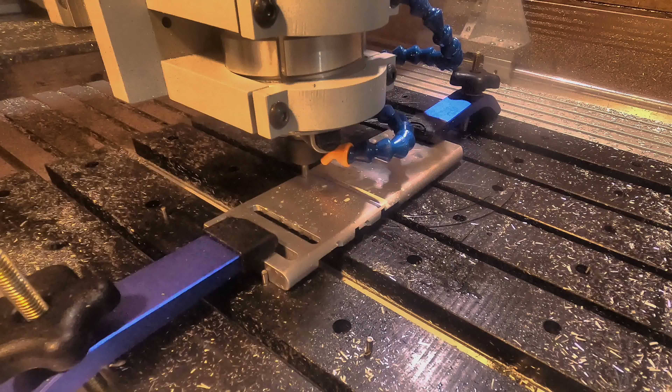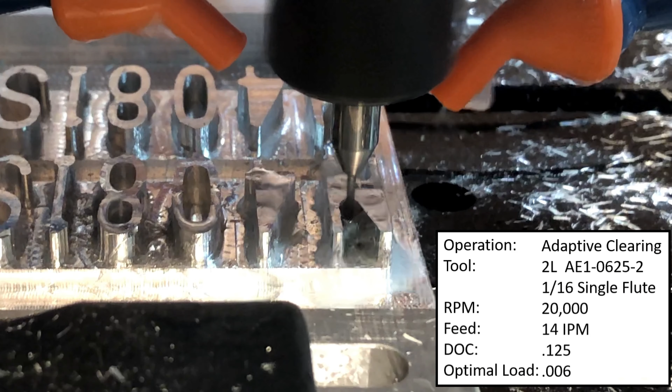Today on Bodie Knows, we're making a custom embossed aluminum keychain on a CNC router. Let's look at the CAD design, machine setup, machining operations with feeds and speeds for you to try, Fusion 360 tips, and CAM programming. I learned a lot making these parts, and I hope you can take some knowledge away too.

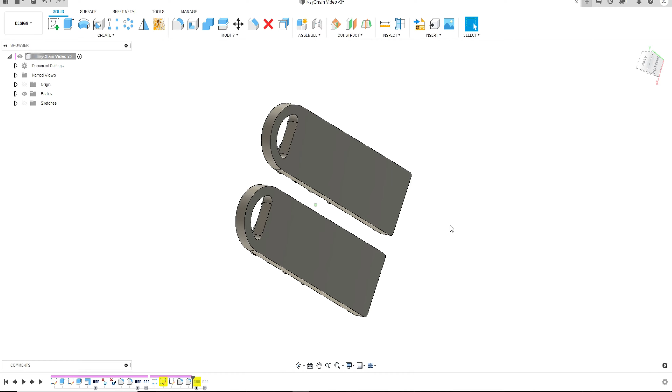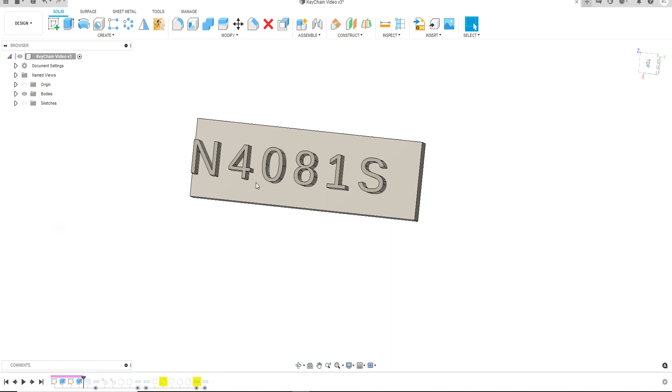Anyways, to get going on the CAD design, first step, just started with a block, pretty simple. I then added these numbers. So something to point out here, if you look at this sketch, to get this to fit, obviously right here these letters and numbers are too short. If you try increasing the height of them, it increases the length as well, and that's no good. Maybe there's an easier way to fix this, but obviously that's not going to work.

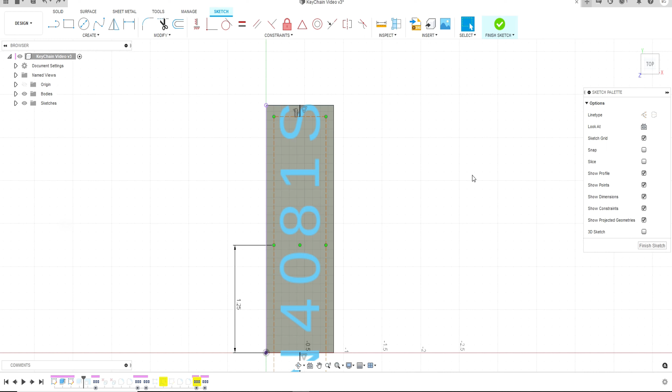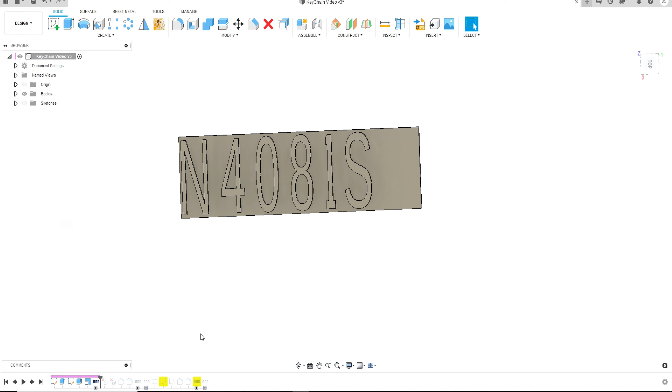So the way around this that I chose to use was just by using a scale function. So right here, I just did a non-uniform scale in the X direction only, and that works really nicely. After doing that, I moved all the bodies around to fit like I wanted to, so just using the move tool, put them exactly where you want. I'm a big fan of keeping bodies separate when you're doing things like this.

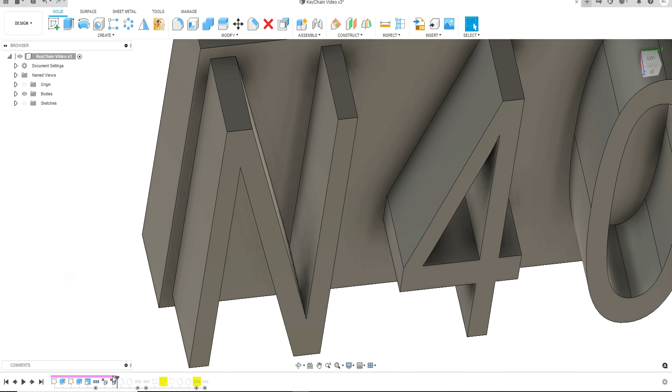Next small modification, sometimes these Fusion fonts come in weird with extra faces and curves that you don't need, so if you try to blend this edge right there, you can end up with problems. So I used a delete face operation right there and on the other side of this end to get rid of those faces before applying my blends. And if you don't do that, those blends can get all screwy.

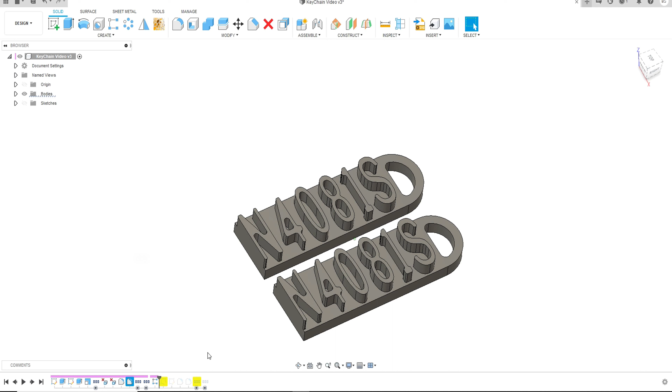I then did that on the rest of the letters and numbers, added this small cutout since it's a keychain, cleaned up the outside profile, basically getting exactly what I want. So really simple design here, only a few steps. I then just used a linear pattern to get my other piece, and you're off to the races. Comment here, I don't think you'd actually need to model this second part if you just used a linear pattern on the CAM side as well, but I didn't realize that until about halfway through my CAM setup.

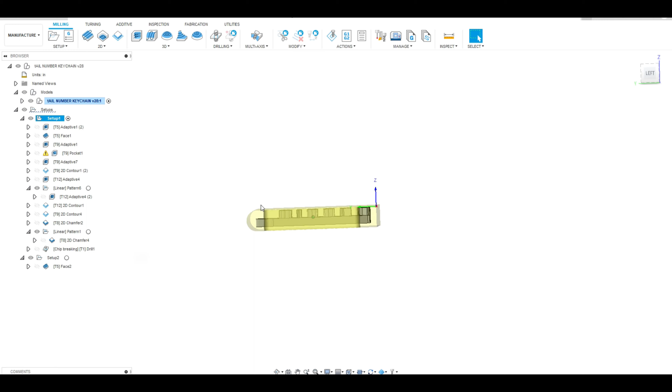To start out on the CAM side of things, I modeled my stock, so that's just an extra piece of aluminum I had laying around. I think it's really helpful to actually use the stock you're going to be using. Started out with a 6mm Datron single flute 4-in-1 end mill, basing my feeds and speeds off this Datron cutting guide, although you do have to modify them a bit because they're telling you to go 40,000 RPM and some ridiculous feed rate that is just not feasible on a desktop router. But it's a good place to start. Their numbers are better designed for high-speed machining and not so much traditional machining.

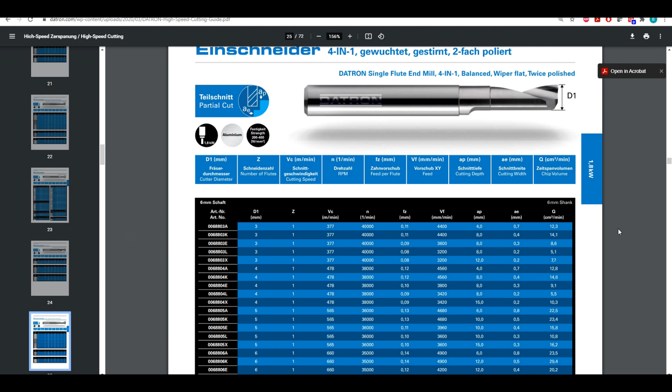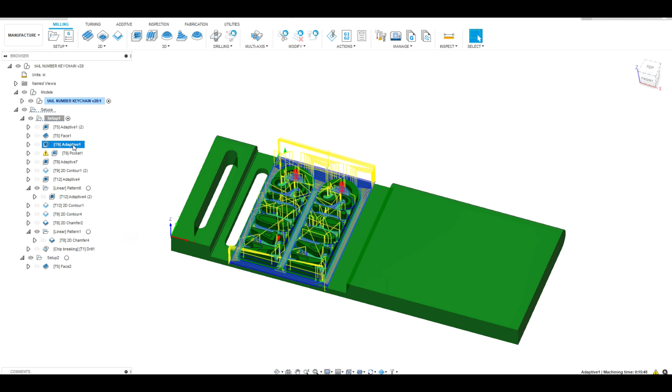Anyways, this tool, we're going 24,000 RPM, 6mm step down, and 50 thou optimal load. Ended up working out pretty nicely. We'll look at it in the machining video. Facing operation just to clean up this top, make it nice and smooth. Then come in with another 3D adaptive, this time with a 3mm Datron single flute. Here we're going 24,000 RPM, but I ended up dropping this to 20,000 when we started machining. 25 thou optimal load and 1/8 inch step down.

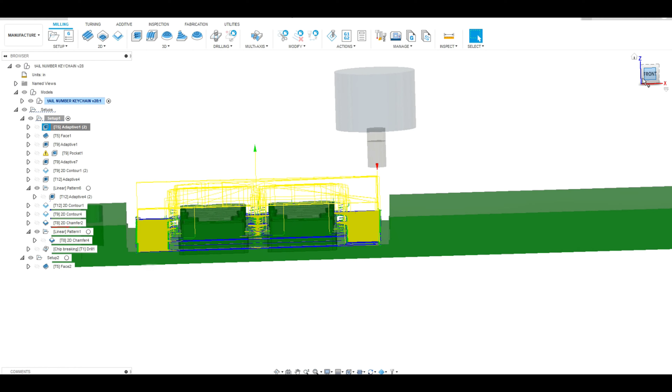Forgot to mention on this first adaptive operation, I do have the shaft and holder option turned on. This tool only has a 7mm flute length, so after that 6mm first cut, if you go down further, you're going to rub the side of the shaft. So I have that shaft and holder option turned on, so it automatically steps over and avoids rubbing the shaft on the stock. That works out really well. I like that feature a lot.

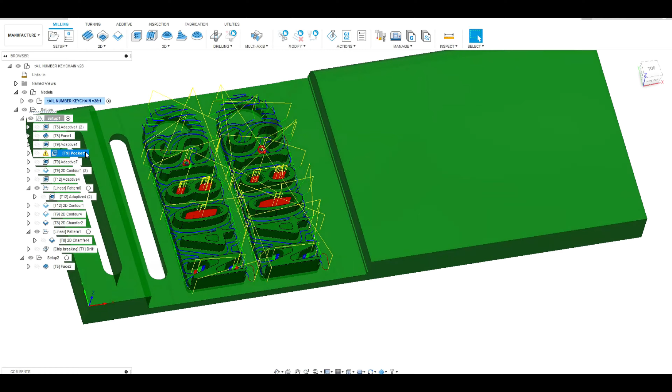After the 3mm adaptive, we do a 3D pocket again with the 3mm Datron single flute, and that's just to get into these small pockets that the helix entry on the 3D adaptive couldn't get. I don't like this ramp situation a lot.

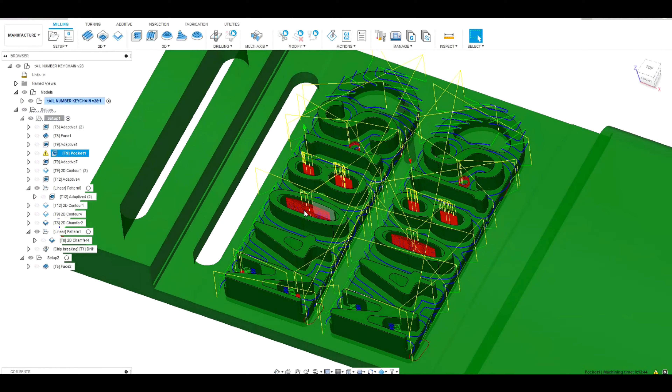I'm not exactly sure what this is called, but I had the lead in way too high, so there's a lot of air cutting on this operation, and next time I would definitely switch things up so there's less air cutting time. Do another adaptive in this pocket, followed by a contour just to cut all the way through, so when I do the facing on the back, I have no material left.

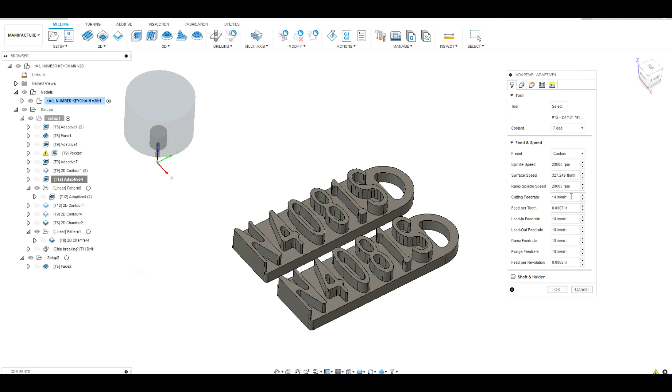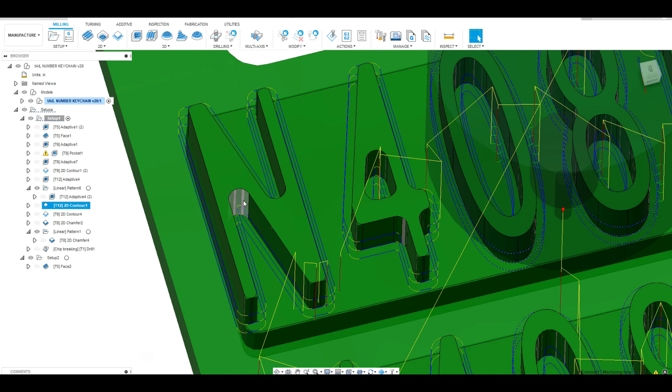I do another 3D adaptive here with the stock to leave turned way down so I get fully in these corners. So when I come around and do this contour next, I don't run into a bunch of stock in these corners and break my end mill, and this worked pretty nicely.

I used a linear pattern here just to do that same operation on the second part. As I said before, I think you could just linear pattern this entire operation and not even model the second part. It would also cut down considerably on computation time. In hindsight, I should have just done that.

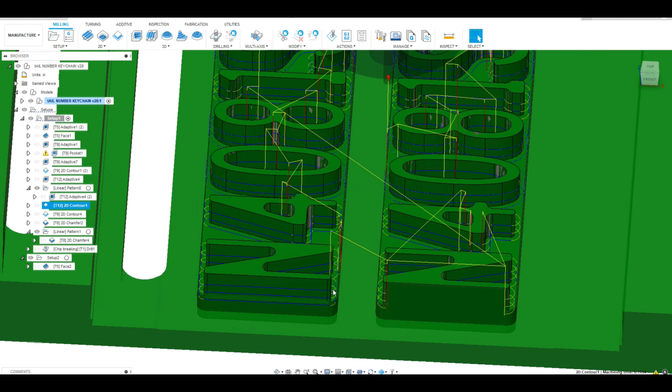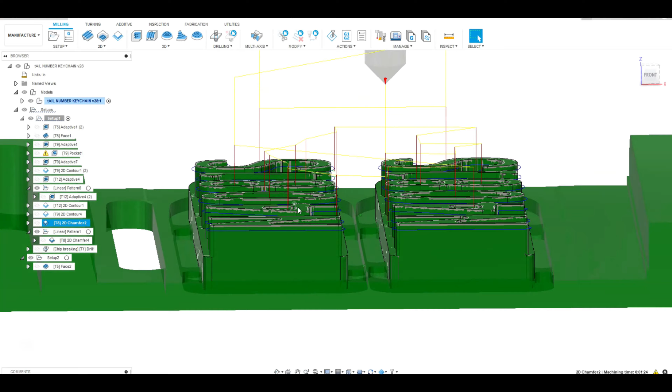So again, next we do a 2D contour for all these letters and numbers with the 1/16 inch single flute. I go even slower here, only 12 inches a minute, and now it's only taking off the stock to leave from the previous operations, which was about 5 thou. Next, you do a chamfer on all these letters and numbers here. There's only a 10 thou chamfer, super light duty, worked out pretty nicely.

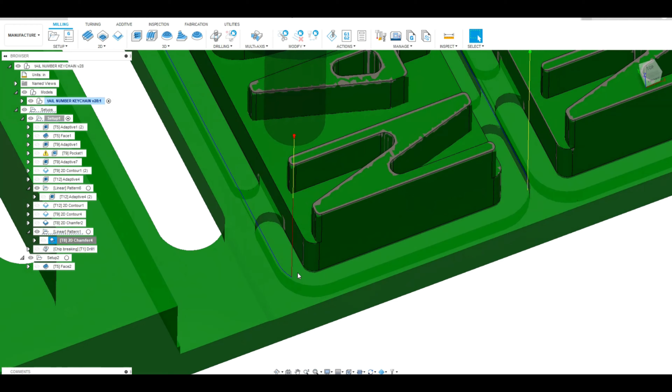And then I chamfer this outside profile of the whole part. So I have it set up here so the tool comes down and comes straight in. I really like that. If you were to set this up what most people would probably consider the normal way, just by selecting this entire outside contour, you'd get a path that looks like this. It would start on the corner and round the corner as it comes in, and that gives you a chamfer that looks like this. I don't love that. I think it's kind of weird how it starts on the curve.

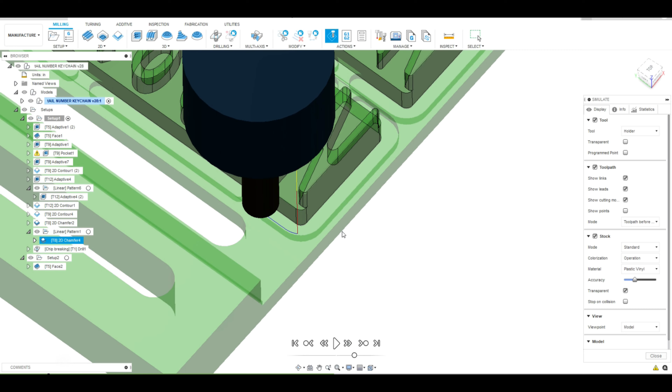I also think that my machine would jar around a lot if it came straight down and immediately accelerated to the left. So I would rather have all that movement happen out here and then come straight into the chamfer toolpath. So the way you can set that up is just instead of selecting that entire outside contour, only select what you want. So click again, make sure open contour is selected.

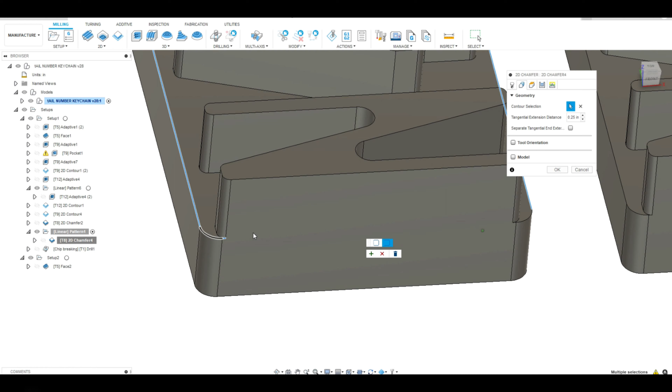Now 1, 2, 3, make sure nothing else is selected by default. So yep, right here we got to get rid of that. It'll get all wigged out if you have other parts in there that aren't part of the path you want. Do not hit OK, hit accept current contour. You need a tangential extension distance. That's just the distance away that it starts out here before coming in.

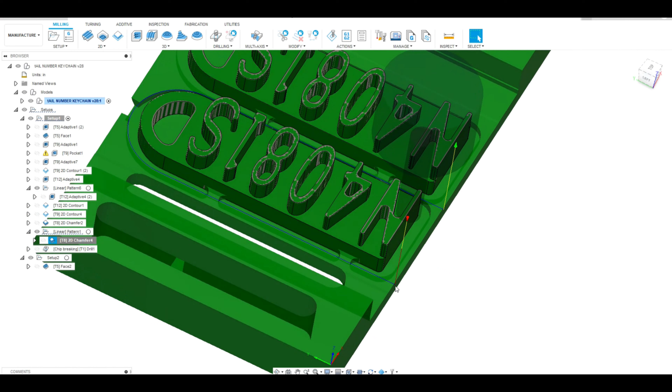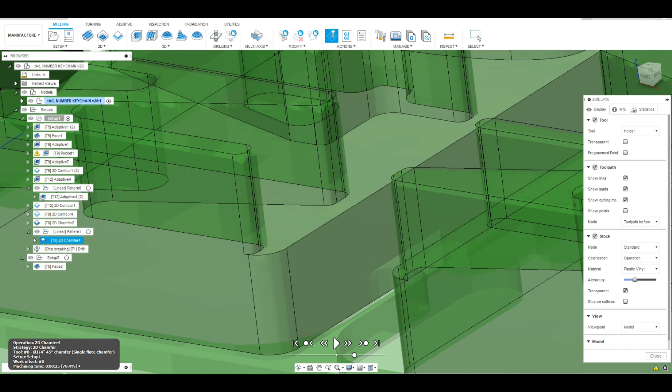Alright, now we have what we want. Come straight down and then straight in. So any movement of the machine is going to take place out here, and by the time it actually starts cutting, you're going to be on a nice straight tool path. Your chamfer looks like this, so even though it comes straight in, the round on the part gives you a nice blend by default coming in, and then same thing on the outside. Comes around. Boom, there you go. And again, I used a linear pattern here to do this.

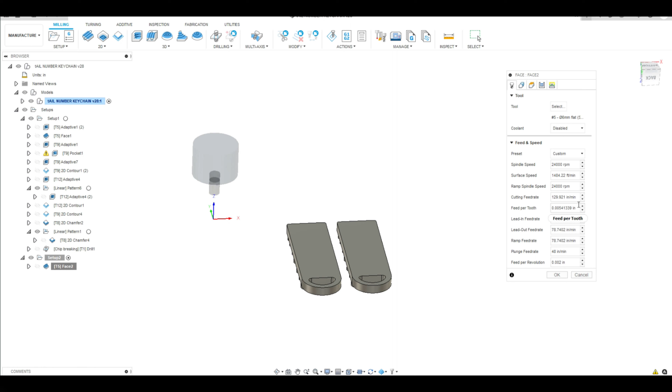For the backside operation, we just have a single facing operation. I'm using the Datron 4-in-1 single flute 6mm end mill again here, going pretty fast, 130 inches a minute. That's 5.5 thou per tooth. Maximum step down of 60 thou, and then I change it for the finish, 10 thou step down and only 80 inches a minute for the finishing feed rate.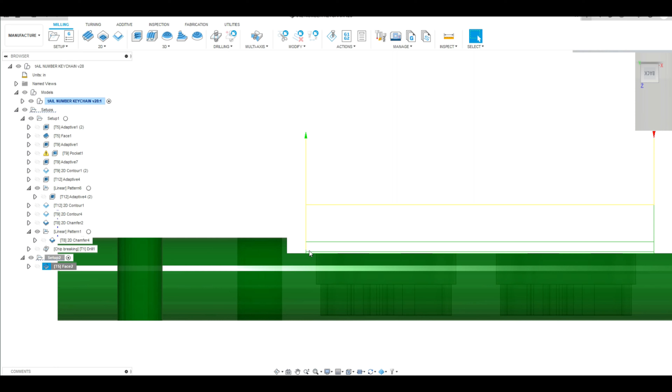So that 10 thou and 60 thou do not divide nicely into the total amount of material you need to remove here. So there end up being 3 different step downs. This first one's pretty light, second one is big, and then the third one is the correct 10 thou. So I'm kind of glad that it happened this way because I got to see 3 different rates. This ended up working out really nicely. It was a huge material removal rate, and we'll look at that in the video.

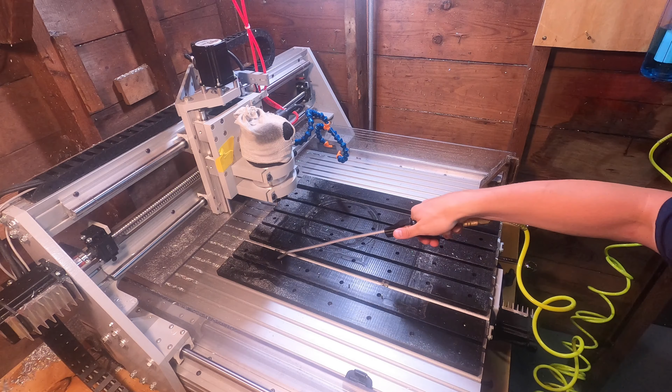For stock positioning, I'm using 1/8 inch dowel pins aligned with the machine y-axis. For work holding, I'm using basic clamps. I really need to get a better setup going on, but these are cheap and easy. The stock position wasn't super critical on this, as I have plenty of stock material on every side of the part.

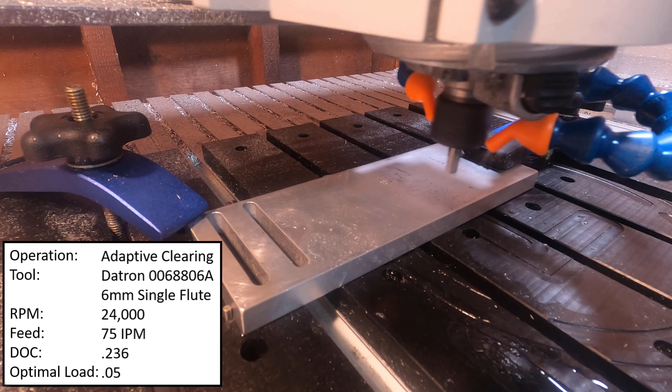This first operation is an adaptive clearing with a 6mm Datron 4-in-1 single flute. I love these things. 24,000 RPM, 75 inches per minute, 6mm depth of cut, 50 thou optimal load. That's about a 0.9 cubic inch per minute material removal rate. Super easy for this guy. This particular end mill is really short and stubby. Very, very little chatter with it as opposed to the long 6mm I had been using before.

You may notice that I have a coolant system on this machine. I'm running Cool Mist 77 mixed with distilled water through a DIY fog buster. Works really well, but does leave a sticky residue once it dries, which is kind of frustrating.

I do regret my clamp placement right about now. You can see the router knocks that clamp loose. That's a very lazy mistake on my part. I did leave 20 thou radial stock to leave on this operation, so I just set it back up and hope for the best. That did end up being a problem eventually, which you'll see. Speed things up a bit here.

I think you could push this end mill a lot harder. The main limiting factor is the adaptive slotting, moving the machine back and forth so fast. I just don't have the rigidity to handle that. But maybe if I took a bigger axial cut and kept the speed the same, we could up that material removal rate. I'm taking quite a bit of stock here just so my machine doesn't start rocking and rolling on these narrow adaptive tool paths. That being said, everything does look really good here, coming in and doing these small pockets, not much rocking or rolling.

Check out how well those chips get evacuated by the single flute. At 24,000 RPM, they're absolutely flying, even with the sticky coolant on them. That being said, I do pop in here every so often with a blowgun to get the ones that manage to stick around. You can see this pretty well in the high speed, but let's slow it down here and show how the stock starts moving right here, which is a big bummer.

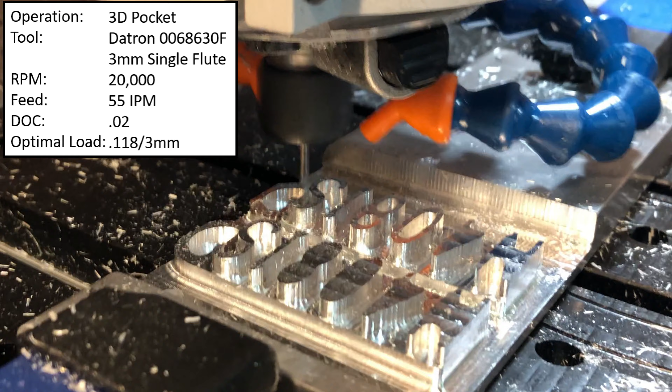Let's look at it with a different camera view, going 55 inches a minute, 20 thou depth of cut. It's a full width cut on that 3D pocket. It went fairly well. I think you could have taken it a little faster. I definitely would mess with the settings though, because again, this is a 35-minute operation that probably could have been cut down to more like 6.

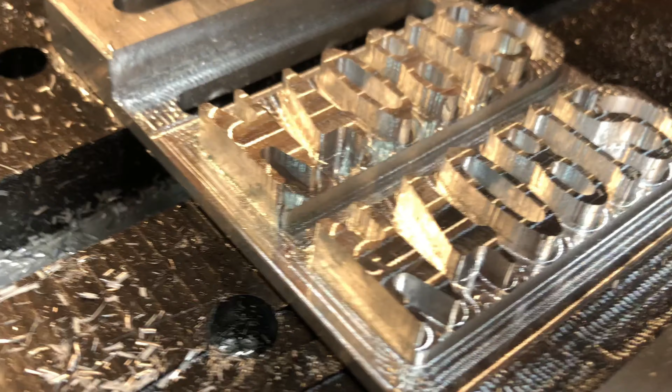I love the way how it gets into these corners here. Look at that, just boom, boom, boom, stepping down to get into the corner. Here's how we're looking after those 3mm cuts. I like what I see so far, no major issues.

Next we've got the 1/16 inch end mill. First impression, damn, this thing is small. First step is the adaptive clear to get what the 3mm couldn't. I do need to apologize for the video quality. I got a new GoPro and apparently do not have the focus situation figured out.

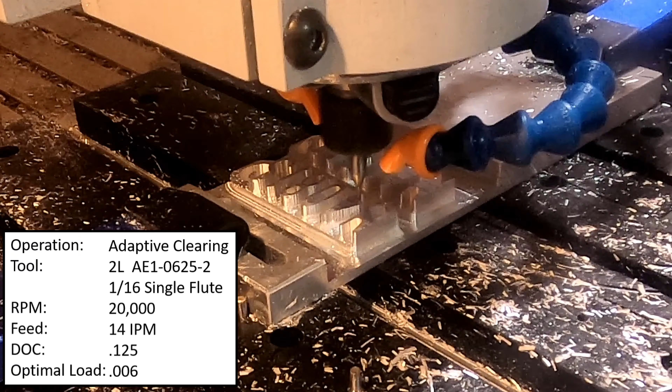I did get some really cool video of my dog Boo running up north though.

Here's another view. Those chips look awesome. I think I did have too much coolant bogging them down, so I eventually turned the coolant off and turned the air up. After the adaptive, we went to a 2D contour with the 1/16 single flute, 20,000 RPM, only 12 inches a minute, 1/16 inch depth of cut, and then only 5 thou optimal load to get rid of the radial stock to leave from the previous operations.

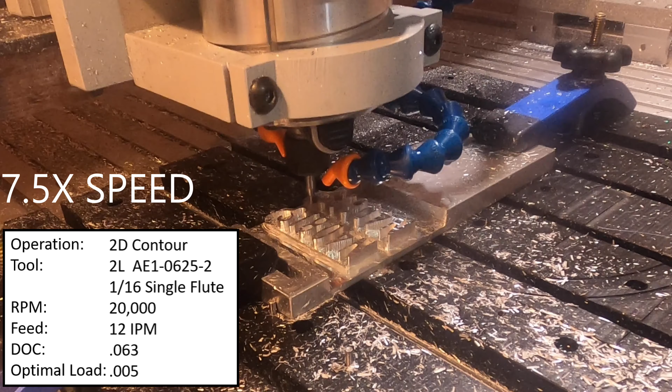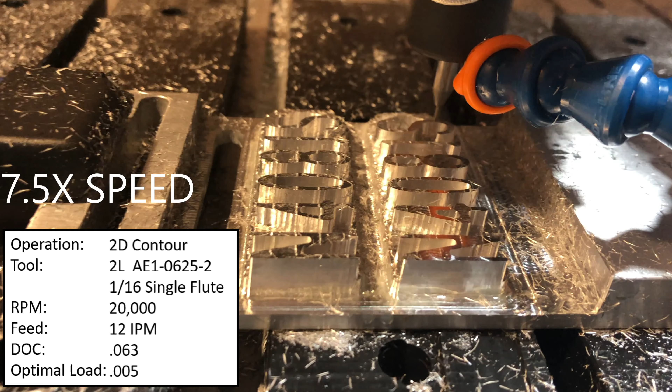This looked nice and clean, but it did take a while at only 12 inches a minute and 3 steps to get down through all that Z height. Gotta run at 7.5 times speed to get us through this video. As I said, I ended up turning the coolant basically off here just to help get rid of all those chips. They do not fly out quite as nicely as they do with the 6 or the 3mm.

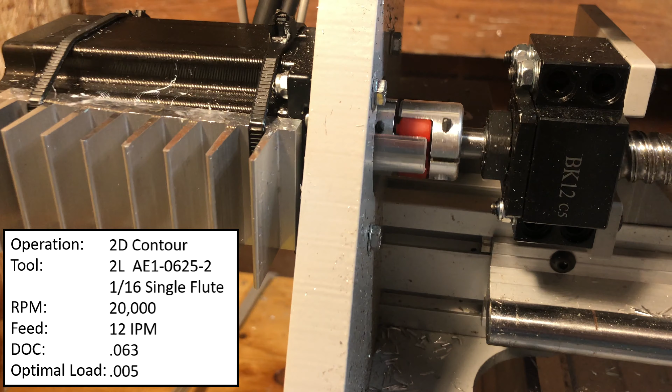I just want to show here how slow that 12 inches a minute is. Here's the stepper motor moving around. Tick, talk. Finally, here's how we're looking after those 1/16 operations.

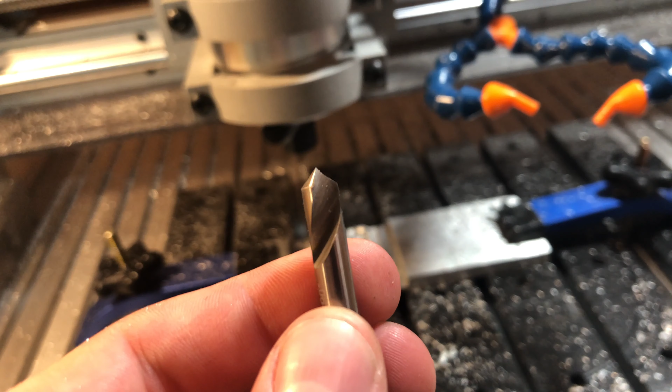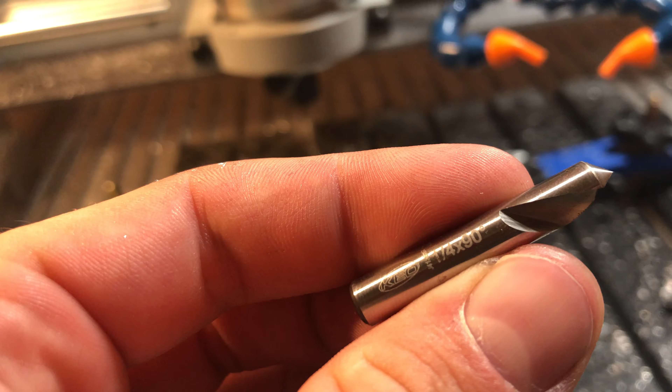The second to last set of operations is chamfering. I'm using this single flute chamfering tool that I originally got from McMaster to use on a drill, but I've been using it on the CNC after I broke my other chamfering tools. Obviously, you've gathered that I really like single flutes, and you can run this thing at 24,000 RPM. I want to show how the Z-Probe program I'm using works here. I should make a video on this. Very easy to program and customize.

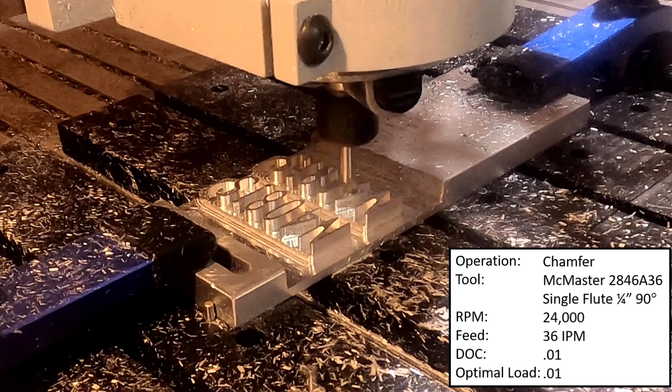This chamfer looks really nice. 36 inches per minute on a 10 thou chamfer, so very little load. The machine just zips around. If you have a favorite chamfering tool, would you please let me know in the comments? I've been wanting to try a helical flute tool, but it's hard to spend like $50 when these simple tools are 10 to 15.

This is a good time to mention that this material is 6061 T6 aluminum. 6061 is by far the most common wrought alloy. Contrary to what you may think, aluminum is super cheap. If you were to buy just this single piece, it would only be about $15.

Here's that other chamfer that we talked about coming in straight from the side. You can see when it came down, there's a little bit of machine movement. That's what I wanted to avoid by having the tool come straight in. Get rid of all that machine jarring before the tool is engaged.

And finally, the last operation is a 2D contour with tabs just to cut these guys out. So full width of cut, 3 millimeters, 20 thou depth, 45 inches per minute, 24,000 RPM. This actually ended up being pretty light. I think you could have taken a deeper cut here, but it only took a few minutes, so no big deal.

You might be wondering how much air this coolant system uses. Well, kind of a lot. I have this hooked up to a 20-gallon dual-cylinder air compressor I got at Menards for $500. I used to have it hooked up to a cheap pancake compressor, but it couldn't keep up on longer cuts.

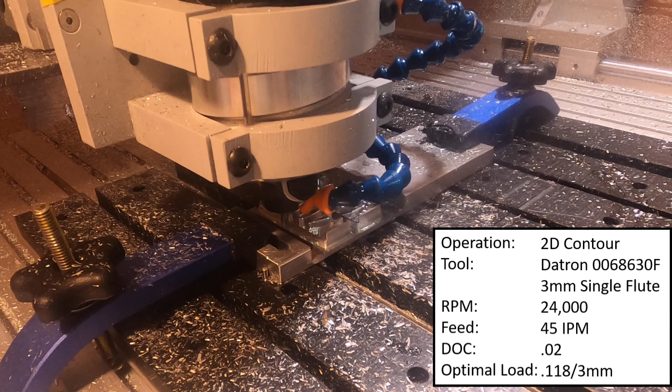Unclamp and flip it over for that second set of cuts. I didn't worry about the position of the stock too much because I was lazy, and I opted to only face the backside. In hindsight, I should have chamfered the backside too.

Here's the final facing operation. 3 different cuts, all at 0.2 inch width. First at 24 thou depth and 130 inches a minute. Second pass at 60 thou depth and 130 inches per minute. That is the most aggressive cut I've made yet. It's about a 1.6 cubic inch per minute material removal rate, which is 50% higher than the numbers I gave in my last video. Last cut is 10 thou depth and 80 inches per minute.

I did end up having a lot of chatter here on that second cut, not from the tool, but because there's just very little material left to hold on to these things. So what was left was moving all over the place. I slowed it down in the middle of that second cut when I heard the chatter. That's my bad for having very little material left, but it was cool to see that huge cutting rate.

Ended up speeding it back for that last finishing cut, which gave a great surface finish, except the damage was already done from the second cut. You can see on the outside there that surface finish looks awesome, but the middle, not so much.

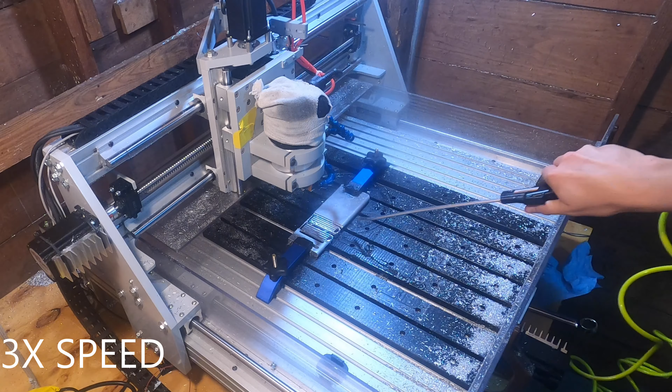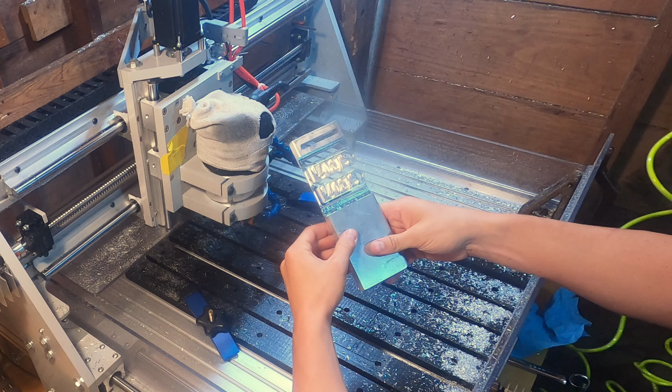When I unclamped this piece, I blew everything off with the router still on. I recommend keeping your router on when you're blowing anything with compressed air so there's positive airflow through the router. That can help prevent chips from going up inside of your router, which you definitely do not want, especially aluminum chips. I've had that happen, and it is quite shocking when the top of the router starts glowing blue from all the sparks inside.

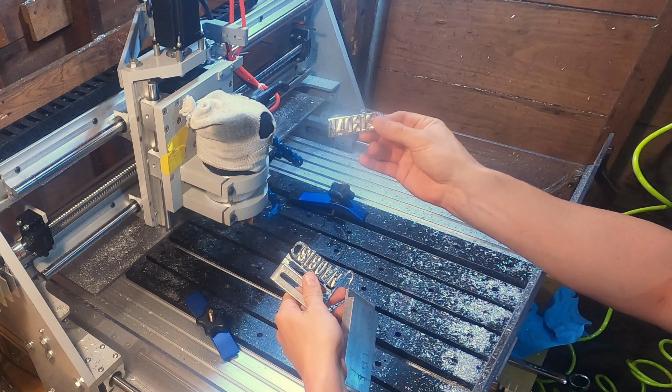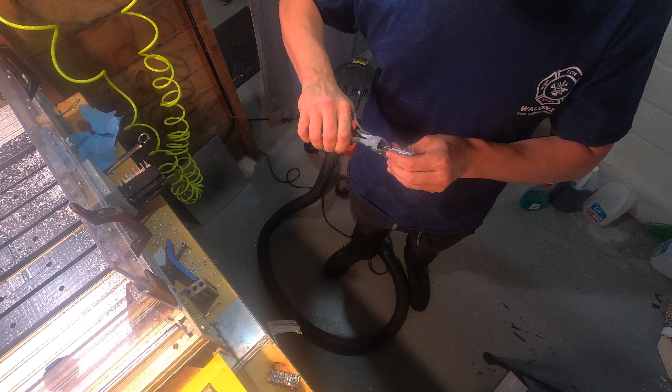Those small little tabs just bend right off, and then you can pop these guys out. I really like that tab feature. To finish these guys off, I just took a little pliers, snipped off the tabs, then took it to an orbital sander with 80 grit sandpaper, and that worked okay. A grinder would have been a less lazy and better decision.

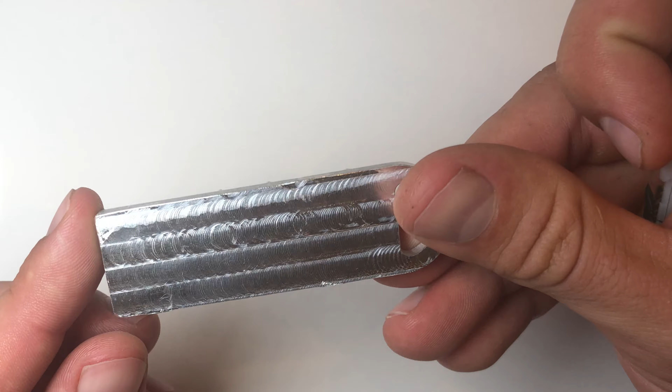So here's the final product. Looks good, and I'm happy with it. Spin it around here for you so you can see all the sides. Those tabs didn't quite come off as cleanly as I would have liked, but not bad. Sanded surface looks okay as well, but I would have preferred to have just left that machined. Again, a little lazy there.

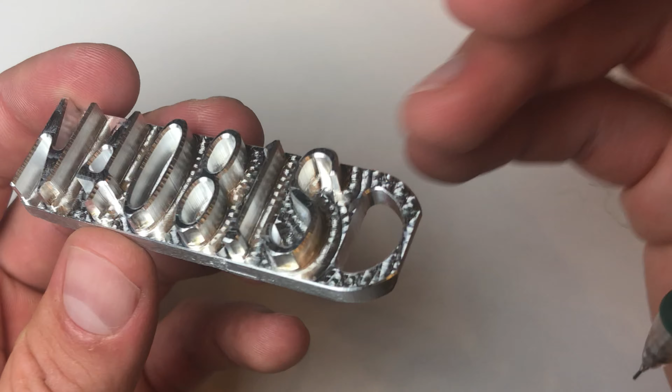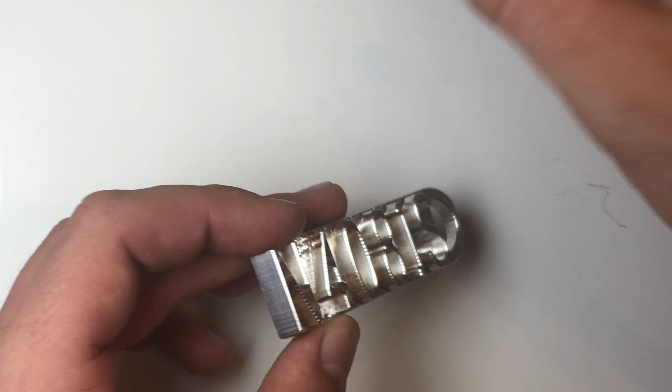Front side looks awesome, except for that middle part where there are some gouges. This is where we had the machine knock that stock loose, the 6mm end mill. Then it took out a little too much material there, not that big of a deal. We do have the same situation on the other part as well. Surface finish looks okay here.

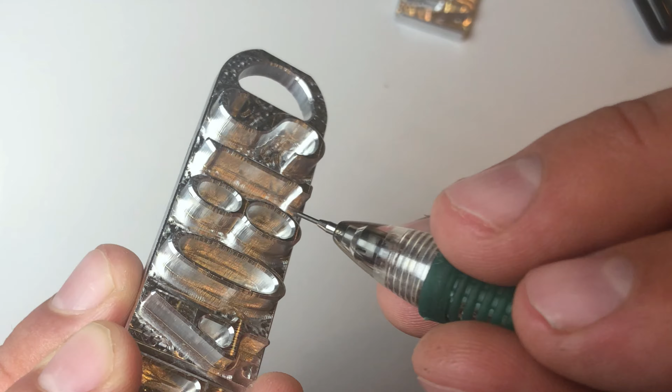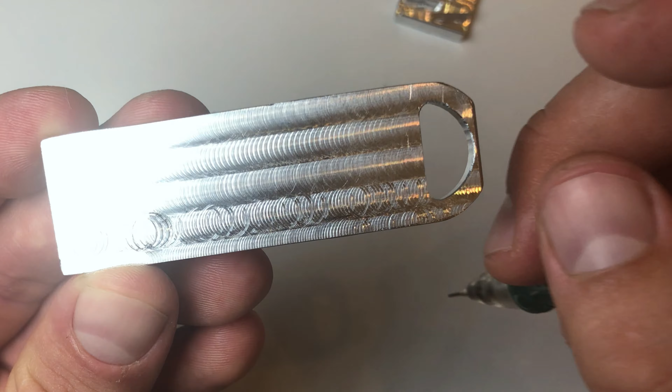I think the hobby CNC combined with the single flute end mill is just limited in the surface finish that it can provide. Bottom surface has some swirl marks here, so those contour and pocket operations could use some settings changed up. Backside surface looks amazing, except for those huge gouges in the middle. Pretty obvious where the material bowed on that facing operation.

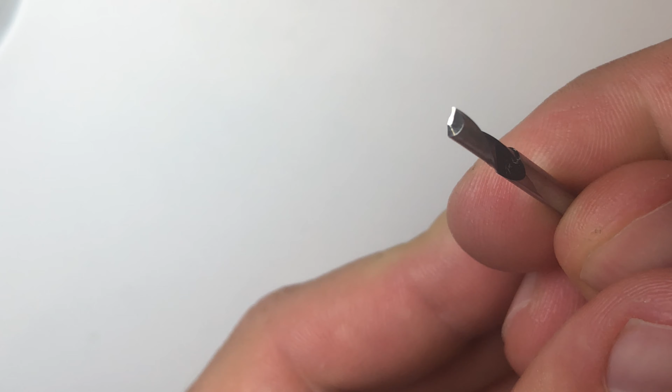Here's that 1/16 inch end mill up close. This is from 2L Inc. Here's the 3mm Datron single flute. Not a 4-in-1 like the 6mm, just a regular single flute. It does have an 1/8 inch shaft and a 3mm cutter. You can see here where that shoulder is and the diameter changes. Datron only sells metric tooling, but some of their small tools are available with an 1/8 inch shank, which I like because it's just one less collet reducer I have to buy.

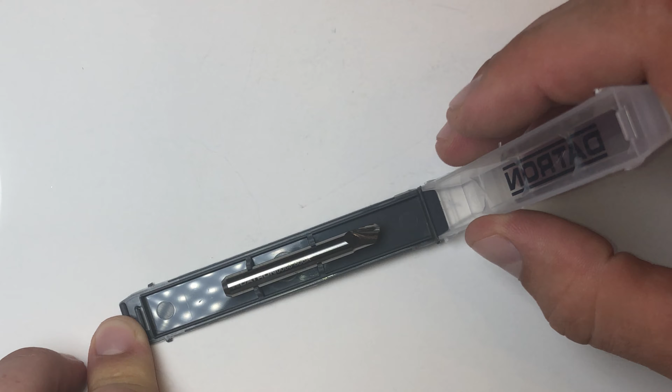Here's that 6mm Datron single flute I love so much. Opening this up real nicely here, just practicing in case someday Datron decides to sponsor a video. Wouldn't that be nice if I could get some of their tools for free instead of paying $70 a pop?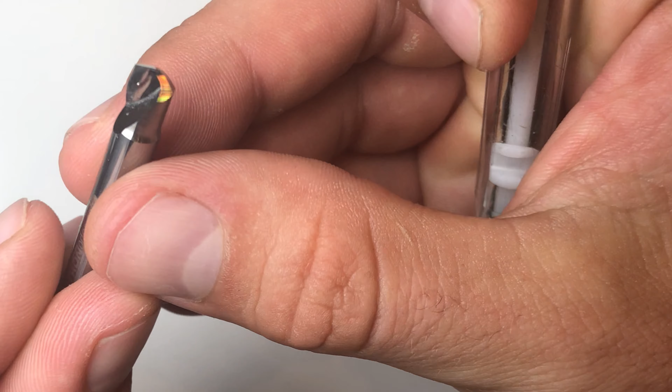0068806A, 7mm flute length and 45mm total length. This is their shortest 6mm single flute. These Datrons have a machined backside, so they're balanced and can run absurdly fast. They also have a wiper flat on the bottom, so you can get a nice surface finish. They run just so much better than any other tool I've been able to find. Also, the most expensive tool I've found, but worth it.

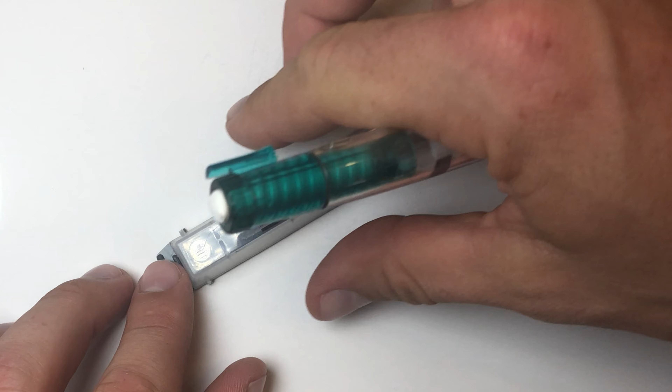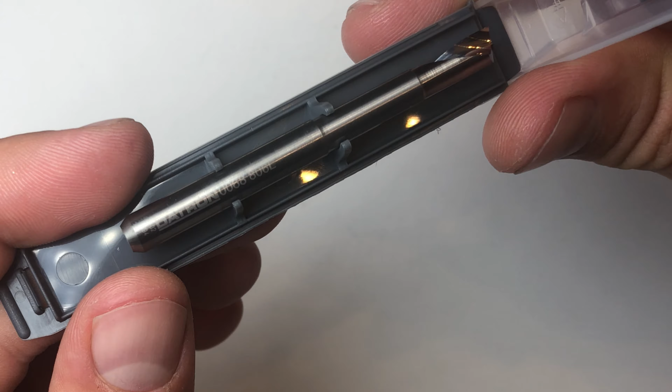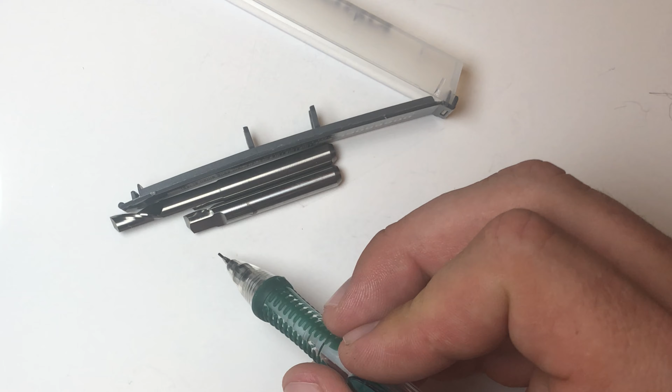Let's compare that to the long 6mm single flute that I used in my previous video. That one is their longest 6mm single flute, 0068806L. You can see this thing is much longer. It has a 31mm relieved shoulder on it and 13mm total flute length. That excess stick out does cause some chatter, all else held equal. There's a relieved shoulder that the short one doesn't have, so you can't get anywhere near as deep with the short one, but you do get a better material removal rate from the added rigidity.

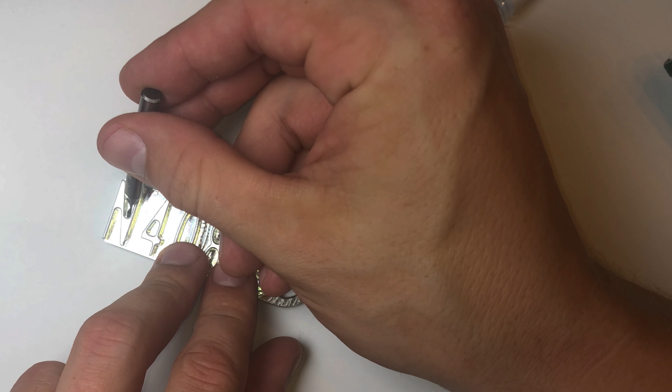So in case it wasn't obvious, let's see why we had to switch up end mills big to small. That 6mm just does not get in very close, as opposed to the 1/16, which does get way in there. I actually think you could have made those radii smaller and gone further in with the 1/16 inch. Those radii are 40 thou.

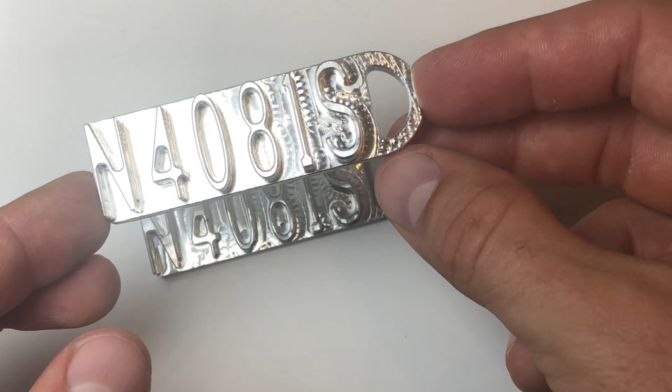To wrap it up, very happy with how these turned out. Just some mild imperfections. Maybe I'm being overly critical, but in general I think this was a huge success. I'm really glad that I didn't break a single tool, even though I tried 2 new ones for the first time.